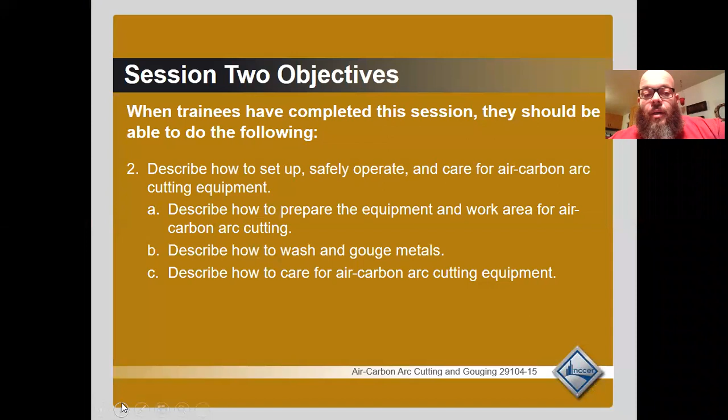Okay, when you complete this, you'll be able to describe how to set up, safely operate, and care for air carbon arc cutting equipment. You'll describe how to prepare the equipment and the work area for air carbon arc cutting. You will describe how to wash and gouge metals and describe how to care for air carbon arc cutting equipment. Performance tasks: prepare the work area, use the equipment, and perform storage and housekeeping activities. Okay.

Concentric cable requires a special fitting. We kind of looked at that in the last one, some of the special fittings on the ends of the cables. They're going to be sold that way. It does make it difficult to make repairs, so you do want to be careful and care for your equipment. Okay. That allows it to be connected to both the air source and the welding power source.

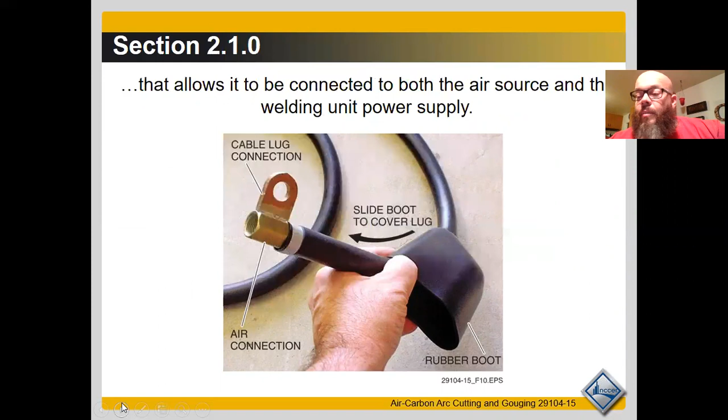So here's a little closer look at that. We have the cable lug with the air connector and then a protective boot that slides over all of that. That's what the end of our air carbon arc cutting setup looks like at the shop as well.

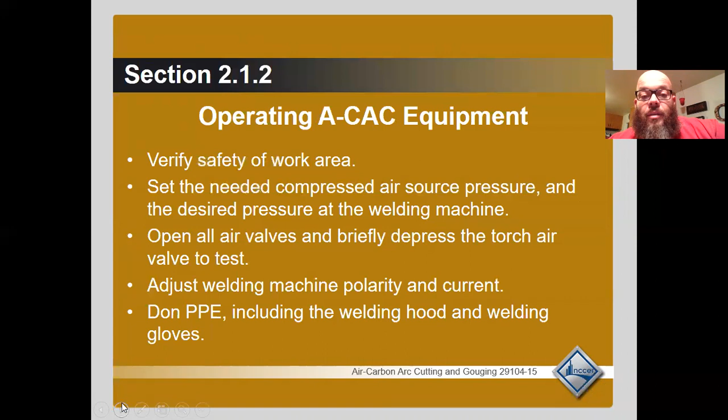Okay, operating the air carbon arc cutting equipment. Verify safety of work area, set the needed compressed air source pressure and the desired pressure to the welding machine, open all air valves and briefly depress the torch valve to test, adjust welding machine polarity and current, don PPE including the welding hood and welding gloves.

Okay, attach the welding machine workpiece clamp to the workpiece, depress the air valve on the torch, position the electrode at a 55-degree push angle with the air jets directed towards the space between the electrode tip and the workpiece. Initiate the arc by briefly touching the workpiece. Keep the electrode near the workpiece to maintain the arc.

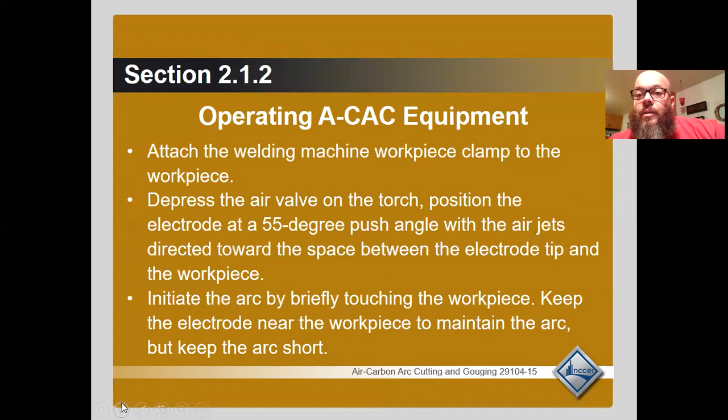Keep the arc short. Actually, what will happen as you're doing this, if you go along and don't continue to push, it'll actually kind of gouge until it just doesn't jump the gap anymore. So it kind of just stops working.

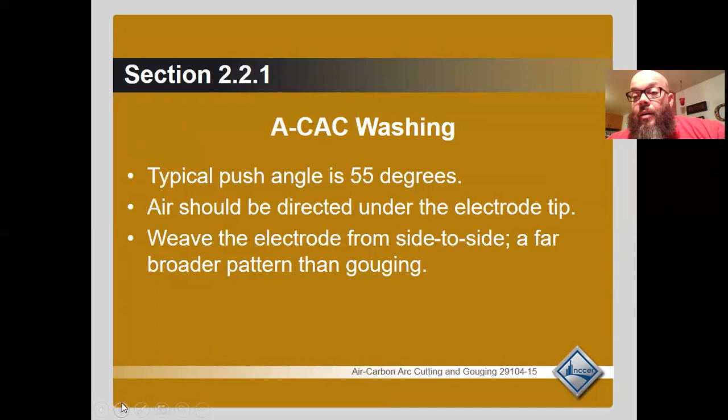For washing, typically a 55-degree push angle. Air should be directed under the electrode tip. Weave the electrode from side to side, a far broader pattern than gouging. We're mainly just going to gouge so that you guys get the basics of what we're doing here.

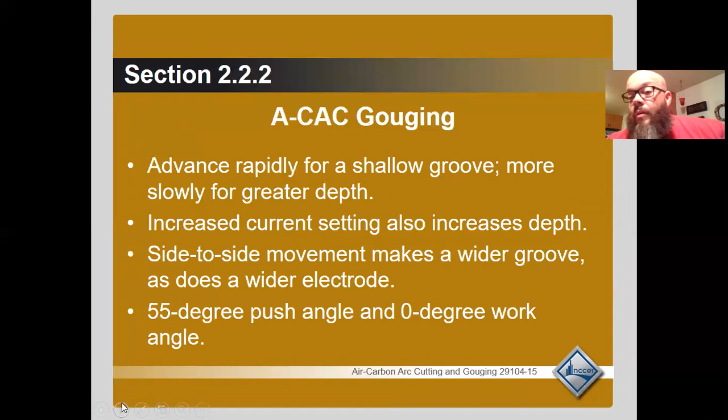Okay, for gouging, you're going to advance rapidly for a shallow groove, more slowly for greater depth. Increasing current settings also increases depth. Slight side-to-side motion makes a wider groove, as does a wider electrode. 55-degree push angle and 0-degree work angle. I will demonstrate this when we set this up.

Equipment care: close all air source valves, bleed pressure from hoses and welding machine, disconnect power supply, and neatly store cables, hoses, and accessories. Return unused electrodes for proper storage, clean work area, and sweep up debris. Never attempt service or maintenance of any type while the machine is connected to a power or air source.

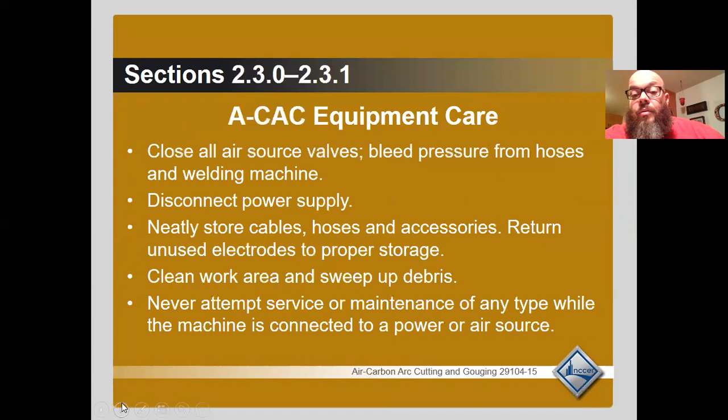Laboratory, we'll take care of this in class. I'll demonstrate all this for you.